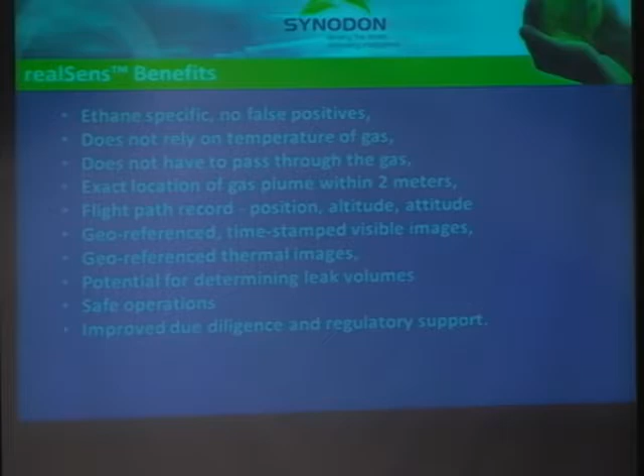Okay, let's see if I've got this right. So what we've developed is a new sensor, a new technology. It's called realSens, the name we've given it. Some of the points are, the first 4 points are fairly significant. It's ethane specific, no false positives, and I want to clarify that.

We can sense methane, ethane, and propane. We've designed it right now to target ethane because, as you're probably aware, if you're flying over a given area in the field, if there's natural sources of methane leaks or methane coming up from the ground, we want to make sure there's no false positives. So by looking at ethane specifically, all we need is 1 to 2% ethane in the natural gas, which currently is in your sales gas.

We have the ability to sense it. If a customer wants us to look just for methane, we can very quickly change there's a reference calibration gas in there. We can change the calibration gas and look specifically for methane. So we can do both very quickly, but we try to target ethane to make sure there's no false positives. We don't look at the temperature of the gas.

We do not have to pass through the gas. We fly at 1,000 feet, 300 meters, and we can identify a gas plume, the point of the start of a gas plume, within 2 meters. So we feel these are kind of differentiating factors that we've developed in this product as we're coming to market here.

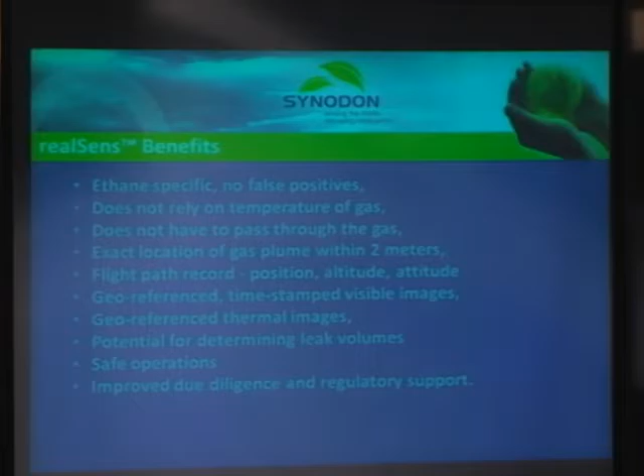We also have good potential. We can take a pretty good stab at calculating a volume, and to our best knowledge right now, the technologies that are out there cannot very accurately pinpoint the volume of a gas leak. They can point out where it's coming out and where the gas may be lying, but they don't have the same ability to calculate what the volume might be.

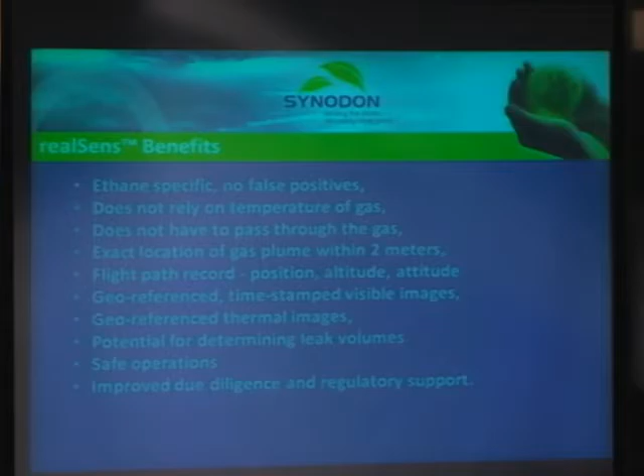So in all, what we've been trying to do here, not only with the sensor that senses a little bit more sensitivity to gas, we're also trying to get rid of any concerns that regulatory companies may have with just the due diligence of how we report this.

So a little history of where we came from. We adopted a technology from the Canadian Space Agency. There was about $40 million spent on this sensor. It's called the MOPITT program, and it actually was mounted on the Terra satellite orbiting the Earth. The sensor itself was looking at CO and methane gas emissions and its accumulation in the atmosphere. Our president, Adrian Bannica, was involved with the Canadian Space Agency, and he made an arrangement with them, and we basically purchased that technology from them, and we've spent about an additional $9 to $10 million currently, bringing this down to a size that's usable in the field.

So we had to develop it to the point where we could mount it safely on a helicopter and fly it. The initial size of it was pretty big. They had to do a lot of new design work on the optics to get the light to focus up on the sensors, and the sensors also were a patented technology. So we've patented that sensor. So there's been that much spent to date.

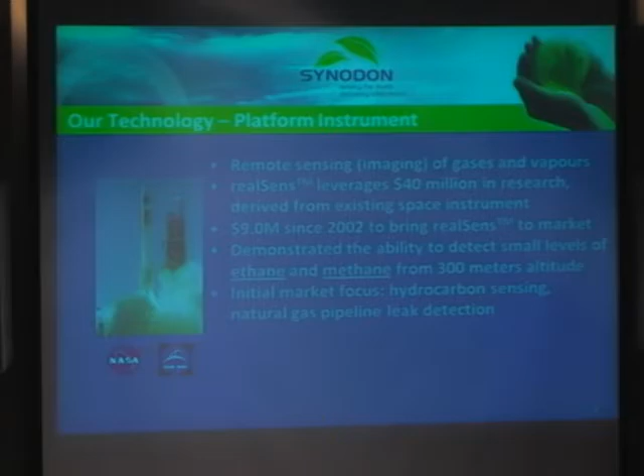They started in 2002, so they spent about the last 8 years developing this. It's taken quite a bit of time to get it to market, but we're right now at the point where I came on board. I was actually currently with Spartan Controls, and for 20 years I was a sales manager for this field sales force, and I'd retired a couple years ago, and I'd actually invested some money with these guys and went in just around Christmas, just to see if their doors were open, which is always a good thing to do if you've invested in a company. And this opportunity to sell came up, so I'm actually quite excited about the technology.

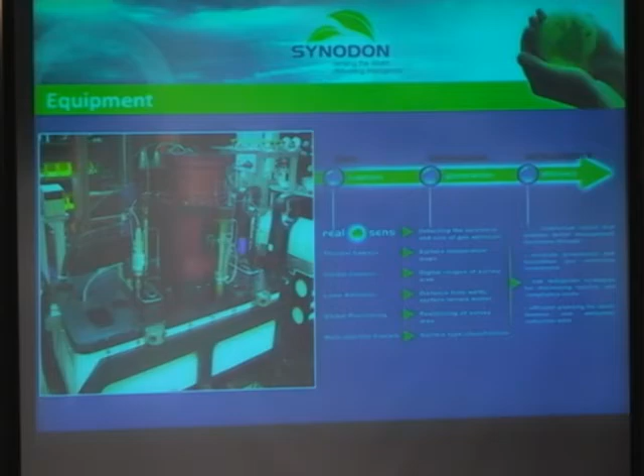Okay, this is a look at what the sensor looks like. That red or orange capsule right in the middle there, hopefully you can see it fairly clearly. That's the realSens sensor that we've developed, spent a bunch of time developing.

Within that box, and you'll see in the next picture how it mounts up on a helicopter, we also have a visible camera taking pictures as you move along. We've got a thermal camera using current technology, FLIR, for thermal imaging. We have a laser altimeter, GPS, and an inertial navigation system, which helps us compensate for any movements in the helicopter, if it sways side to side or does any weird movement while the pilot's flying it, to make sure we stay consistently on the flight path.

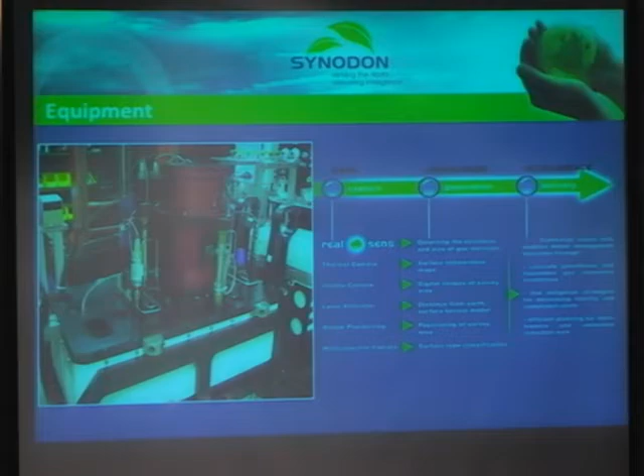Our plan to go to market is we're not selling the sensor and we're not looking to get into the helicopter business. We're prepared to line up with whoever the customer asks, if they have an existing helicopter company doing surveys, or if they just want the whole service, there's a group of helicopter companies we will fly with. The pilot has a pretty straightforward system we've provided that helps him understand where he has to fly the helicopter.

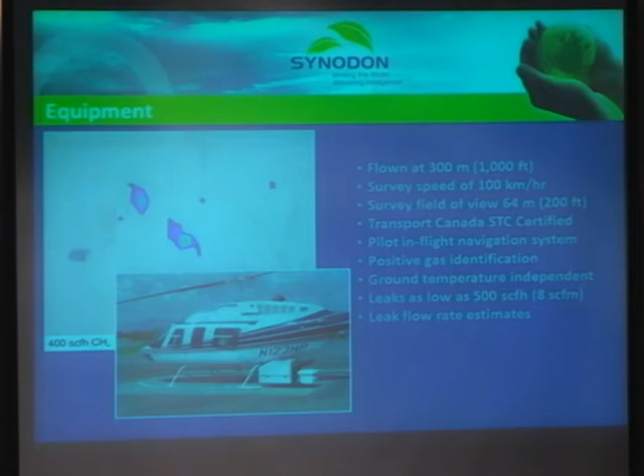Now this next slide, one of the customers I was talking to actually pointed this out. It wasn't part of the original design, but it was a factor he brought up about operational safety, so we thought we'd include it. Right now, as far as we understand, all the surveys done at low level are done between 100 and 400 feet, because they either have technologies that have to fly through the gas to sense it, or they're down that low to get a good reading, flying the lines visually. And we fly at 1,000 feet.

One of the things, I don't know if you're familiar with helicopters, I wasn't familiar with this. I always figured if the engine quit, you're done, it doesn't matter what altitude you're in. But as I've since learned, there's something called auto-rotate. If you're up higher than 400 feet, the pilot has the ability, as the helicopter falls, to auto-rotate and do a safe landing.

This is coming from the helicopter community: if you're anywhere between the 40 and 400 foot range and you lose engine power, it's a pretty severe crash, usually with fatalities. If you're under 40 feet, you've still got a pretty hard landing with some injuries. So when we became aware of that, from our customer, we thought, well, it's another benefit that we fly at 1,000 feet, whether it's for the pilot himself and our technician, or for a customer riding along. I think it's a significant point.